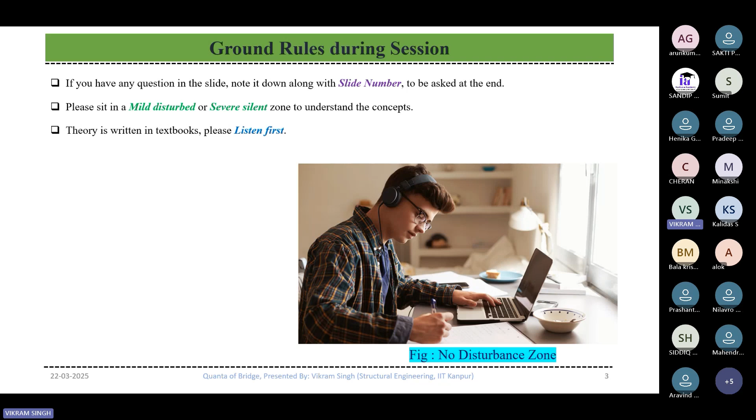Okay. So what is meant by bridge engineering? So let's see a video which will explain you a bit of bridges. Although you are completely aware of what is meant by bridges, the purpose of this video is especially to explain to you what is the extent of bridges which we have been working on, or I have been working on.

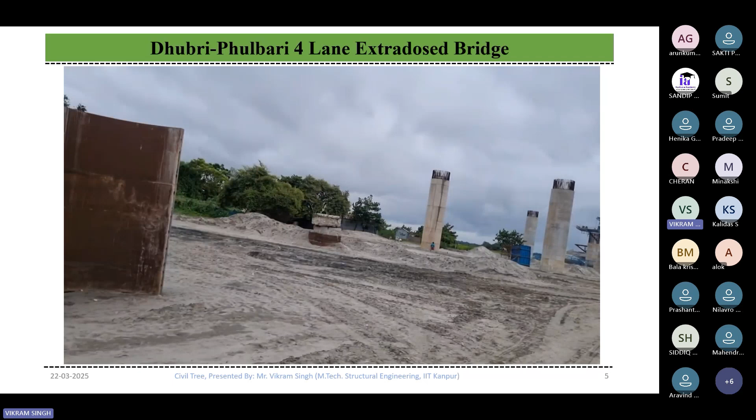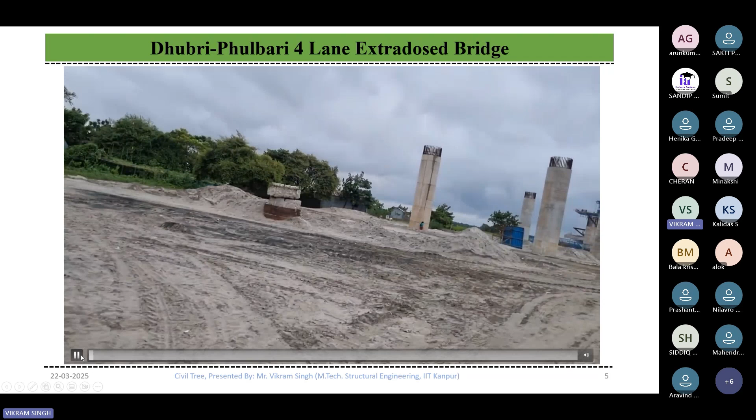So just for the confirmation, I hope the audio of this video is also audible. No, actually, only the video is visible. I'm not sure how to make it. Okay, just give me 1 second. I will try this if it can be possible. Audible now? No, actually, I think your system audio settings need to be changed. Okay, it's okay. Just try to see this, and even if it is not audible, at least you will get the visuals here. I will just skip this video in a few seconds only.

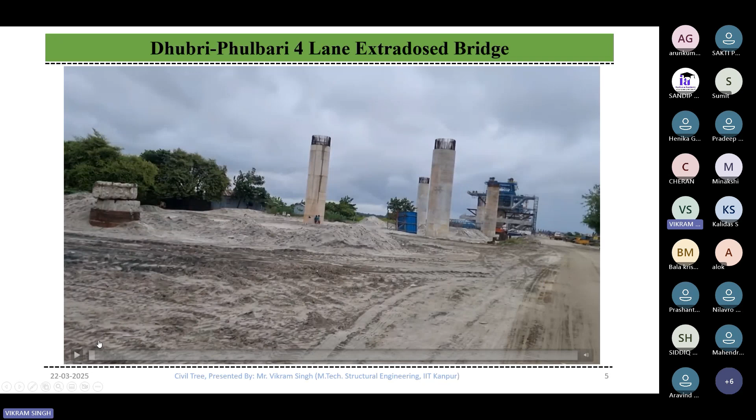See, this is the extent of bridges we are talking about today. This bridge, which is shown here, has a width of 28 meter. The depth here is actually 6.7 meter. And the width of pier here is actually 4.3 meter. So this is the extent of bridges which you will be working on when you join the bridge engineering industry.

I will not say that this will be the first project you will be working on, but these are the type of projects which you will be encountering in your career. And believe me, designing and working on such kind of projects has been really a good experience. But for that, you need to work on several types of projects, several spans, configurations. Only then you will achieve the level where you will start working on these type of structures.

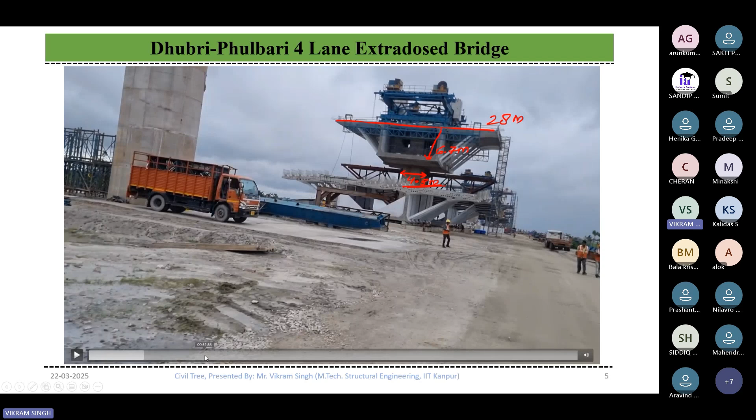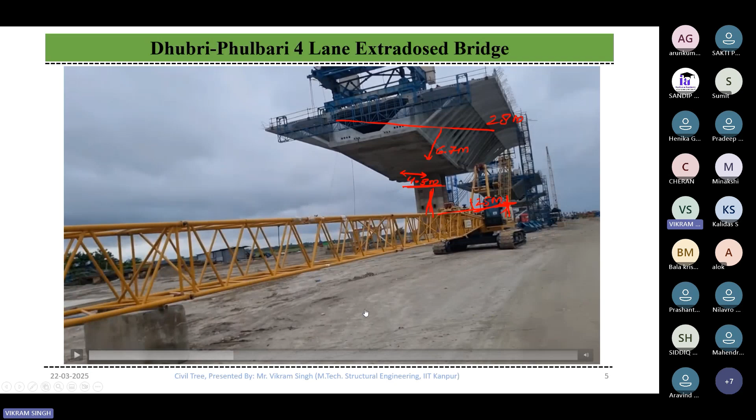Okay. And when we talk about the span of this bridge, this was actually 125 meter. So one pier is here, second pier, and the span is 125 meter here. So this is the level of extent to which the bridges are constructed. Not always like the 20 or 30 meter span which you generally see. But these bridges are highly special. So we need a special experience to work on these type of structures. You can see the distance between the piers here also.

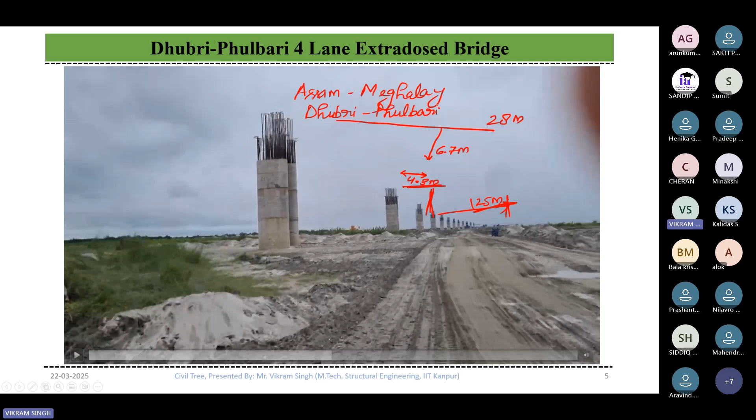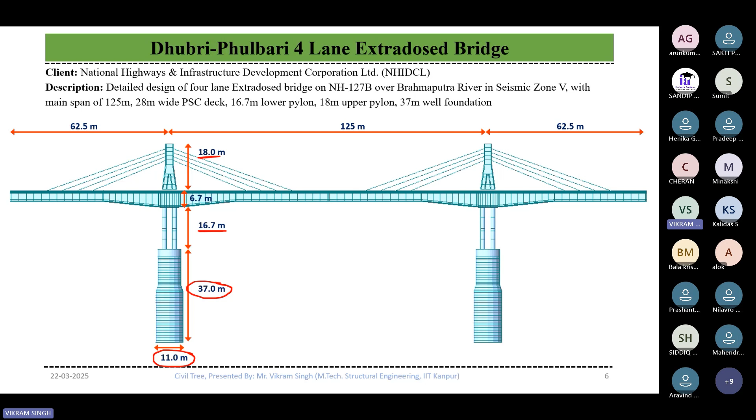Let's move ahead towards the real bridges. Just give me a second. Yeah. So what is a bridge? Generally, we say there is a bridge, this is a culvert, this is a causeway, this is a vented causeway, there is a flyover. So what is meant by a bridge? In general, all those structures which you see, which have different nomenclatures, are called bridges. But what is meant by bridge in general?

So in general, the bridge is the way of connecting two places. A bridge is a structure brought forward under construction to surpass an obstacle without affecting the properties of the obstacle. So let's say there is a bridge or a flyover connecting one place to another. You don't want to affect the properties of this river channel or sea. That's why you are bringing a bridge. If you could alter the properties of the obstacle itself, then you don't need to construct a bridge. If you just fill the soil strata over here, then you don't need any kind of bridges, right? So there are different categories technically in the bridges itself, but in general, all those structures are called bridges.

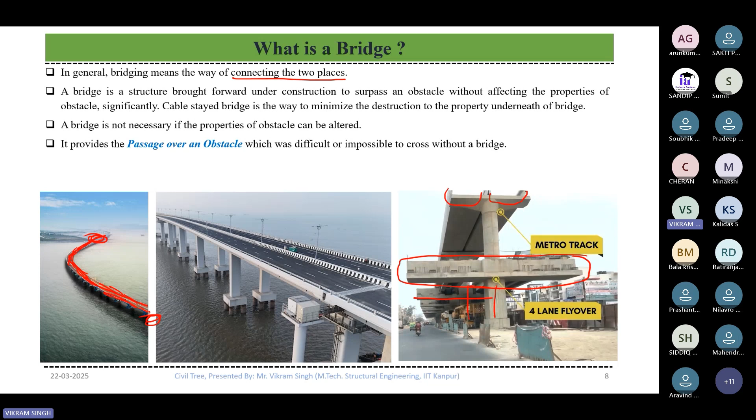In the past or ancient era, we had natural bridges. At that time humans did not know what is meant by cement, concrete or steel or how to construct a bridge. So the wooden arms which fell down on the ground, humans connected all those branches and formed a structure to pass this water carrying channel. So in general, this is also called a bridge.

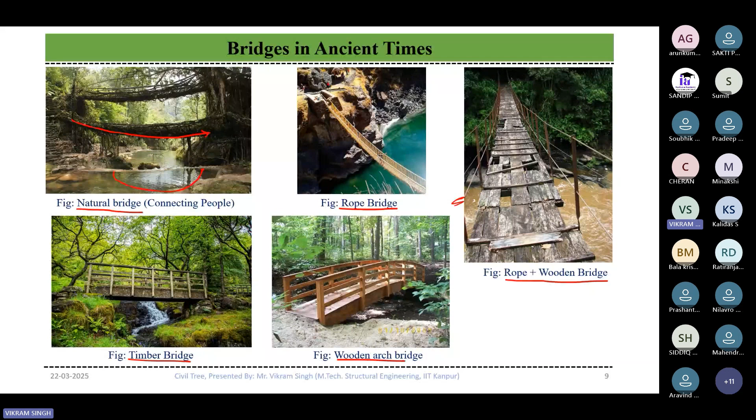Then when they developed the thinking capability, they constructed a rope bridge or rope plus wooden bridge. And now you see different types of bridges in different locations and areas. Depending on the location, be it a valley, plain ground, hilly ground, or Registan or anywhere, different types of bridges are constructed.

In the modern era, we have different types of bridges, but in general, bridges are divided into 6 categories. Each bridge may fall into 2 or 3 different categories; it is not only simply supported or arch bridge. For example, in general we call this a truss bridge, right? But it is resting over the bearings, so this is also termed a simply supported bridge. So the same bridge falls into 2 categories, simply supported bridge and truss bridge.

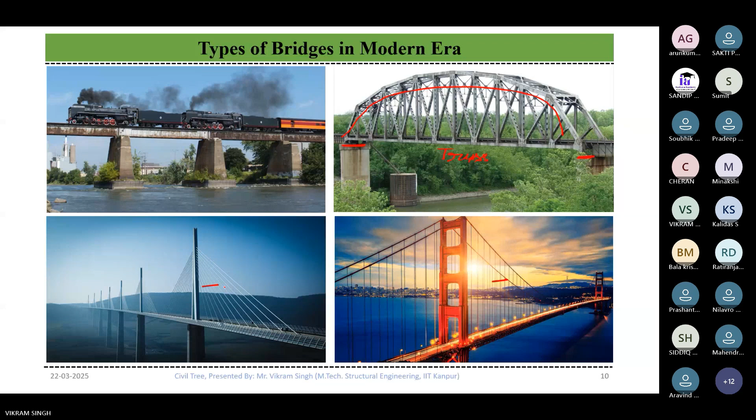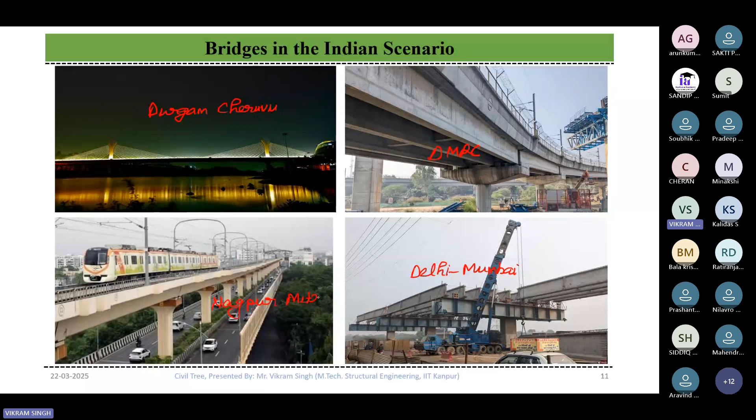Okay. And at the bottom, this is a suspension bridge. And on the bottom left, it is a cable stayed bridge. So in today's era, we have different categories of bridge. If I name some of them, this is in Hyderabad. This is the DMRC, Delhi Metro Rail Corporation viaduct. This one is under construction, the Delhi Mumbai Expressway. This is still under construction. And this one is Nagpur Metro. So all the figures given here are real life examples of bridges.

Then when you talk about general bridges, when we are working in the industry, we have different types of nomenclature. When I'm designing bridges, I don't even care whether it is longitudinal girder, abutment, cross girder, or pier. We don't see these kinds of figures. This is an academic figure. When you start working in the industry, this is the type of figure you will see.

Okay. But in general, when you are starting the journey in bridges, when you are asked questions in interviews, they will generally refer to these types of figures. Why? Because freshers or beginners have been through the academic books only. They are not industry experts. They have not been through the industry. So personally, I don't expect anyone to know about bridges already.

One of the major questions I generally receive from beginners is, if I appear for a bridge engineering interview, what kind of questions will they ask about bridges? If you are going for a bridges interview, the person taking your interview doesn't expect you to know even A or B of bridges. Even when I was going through my masters, I did not have the bridge engineering subject. In 99% of cases, the bridge engineering syllabus is not available in the academic curriculum. So interviewers don't expect you to know bridges before working in bridges.

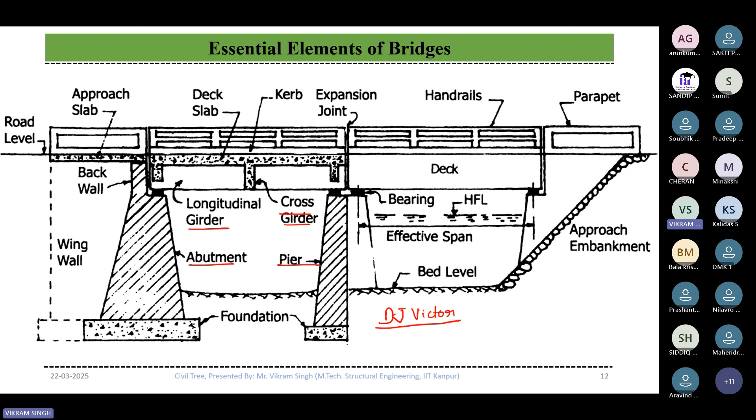Then there are different types of bridges. Some of the bridges have prestressed I-girders. Some of them have prestressed box girders. Some of them may have steel girders, plate girders. Some of them may have trusses. If you are aware of the Mumbai-Ahmedabad high-speed rail, it is being constructed with 40-meter single spans, a single entity of 40-meter length.

This is one pier, the second pier, and they just bring one segment of 40-meter length with 3-meter depth, which weighs around 1000 to 1100 tons. So they are carrying big machinery to construct this structure. And along with this, you will find several types of PSC girder, box girder, and steel girder or truss bridges also, depending on the suitability of the location.

Let's say you are constructing a bridge over a busy highway. Then you cannot stop the traffic. So you have to bring forward a solution for which you do not need to stop the flowing traffic. So they brought forward the steel truss bridge for that. As far as I remember, it had a span of 135 meters.

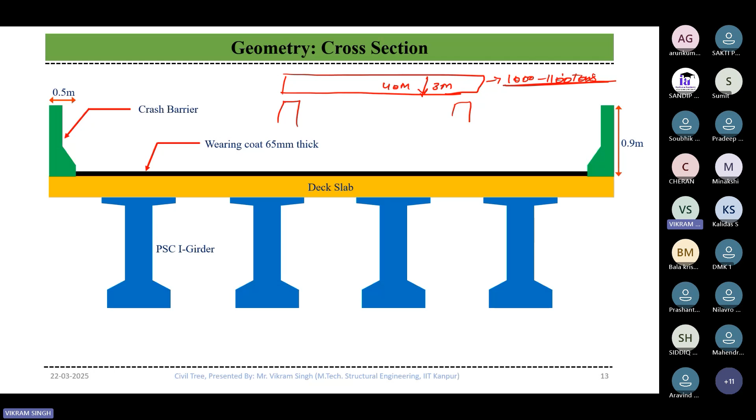Hello. Hello. Yes, Vikramji. We are. Okay, you are audible. If I skip somewhere, please inform me, because I'm getting a sound like my internet connection is not stable. No, you are completely audible. Okay, no problem.

So when you are constructing bridges, the first and foremost question I may ask you, or someone may ask me, is: I have a 1-kilometer-long flyover, what kind of structure shall I suggest? Shall it be a concrete slab beam, an RCC T-beam, a PSC girder, box girder, or may it be extradosed, cable-stayed, or suspension bridges?

The longest suspension bridge right now available in the world has a span of around 1900 meters. The clear span between the two piers is more than 1900 meters. I'm not sure exactly about the value. It may be around 2000-something meters, but this is the longest span. So let's say if I'm going to construct a 5-kilometer-long bridge, I can just construct 2 or 3 spans only. No need to go for 100 or 500 spans.

But why do we not go for such bridges? Forget about the suspension bridge. People are even scared of cable-stayed bridges and extradosed bridges. They hardly go for RCC T-beam or concrete slab. But most of the bridges and flyovers are constructed with PSC I-girders and box girders. But why? So when you go to the economic study of structures, especially bridges,

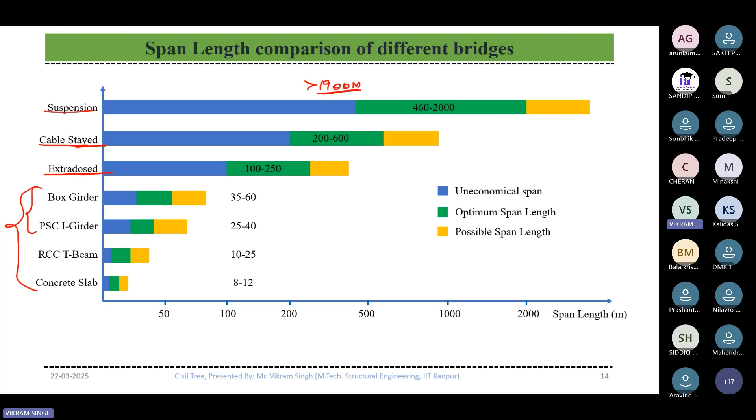So when you face interviews for bridges, these are the kinds of questions they will ask you: if I give you a span of, let's say, 30 meters, then which kind of material or type of structure will be more suitable? Okay. Now let's say you are going to design a bridge with PSC I-girders.

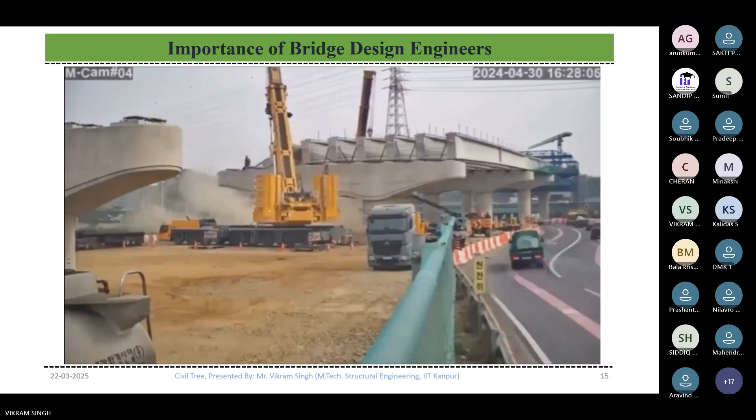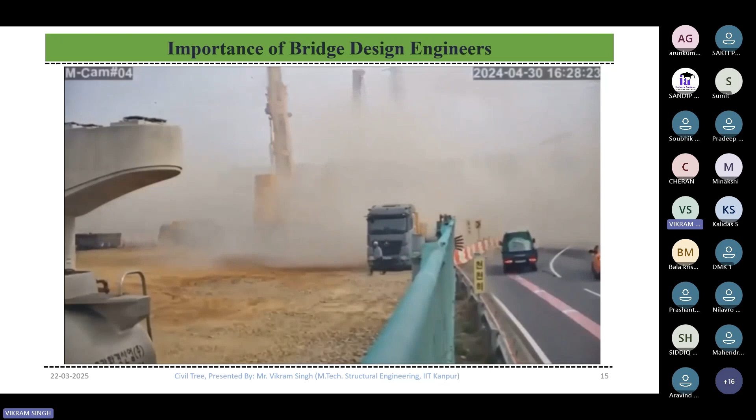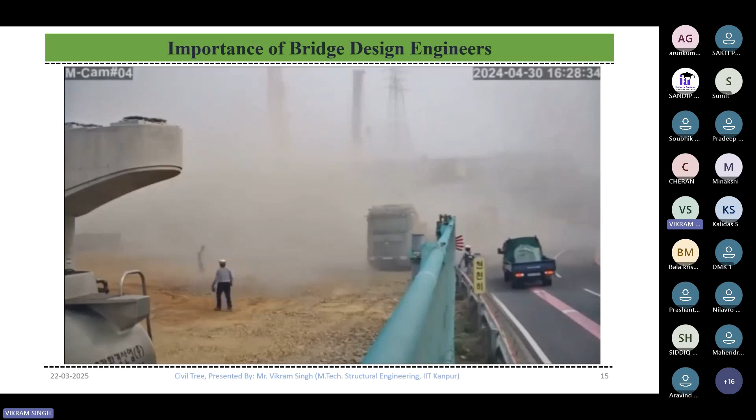See this, just one minor error on the construction site and the entire span fell down. That's the importance of engineers, be it design engineer, site engineer, or safety officer. All of them are important given their specific roles and responsibilities.

This incident might have been avoided if the engineer was there to guide the laborers, to guide them how to construct this kind of bridge, or not just construction. There are small activities which may lead to disaster on the site. So engineers shall be there to guide the laborers how to handle the different types of components.

Okay. Although nobody wants to lose their life, they are already taking care of each and everything. But laborers are not engineers. They don't know the implication of each and every component on the site. So you are there, who are aware of each and everything in this field.

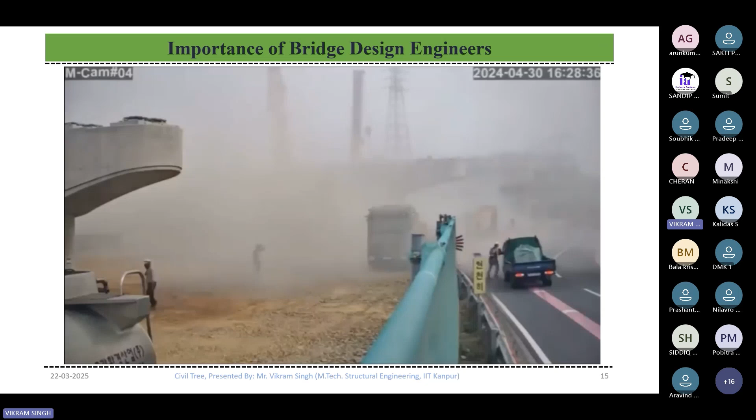I'm not saying that you are a fresher and you shall be aware of 100% of everything, but you are also guided by the seniors. So you learn from them and guide the laborers what facts or rules you have to remember while constructing or handling this component, right?

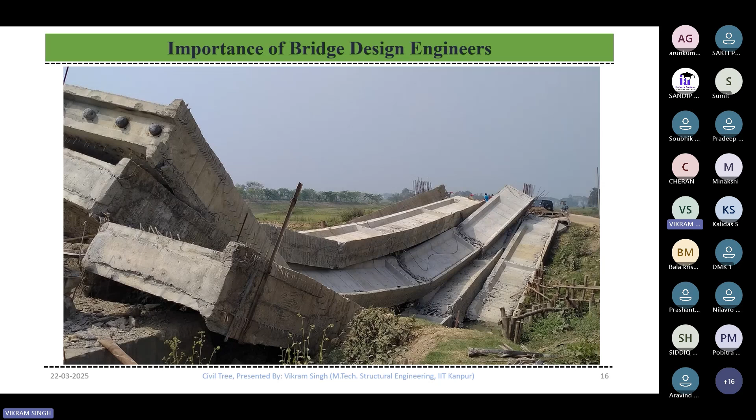See, this is one more case of falling girders, PSC girders falling on the ground. Just kept on the pier cap and the girders fell down. That's it. The deck slab is not cast, no vehicles, nothing. The girders fell by their own self-weight.

Okay, so when there is any allotment of a project, there is not only a single authority. There are different types of authorities who will be working for a single project. So there will be one client. Let's say there is a highway project and the client is NHAI. NHAI will allot the project to some contractor after the bidding process.

The bidding process is a different procedure. You can just go to Google and find out what the tendering process, bidding process, all those things are. I'm talking about after the allotment of the project, how the work flows. So NHAI is one client. They want to construct a bridge.

So what they will do, they will allot this project to a contractor. The contractor will bring all the materials, machinery, and they will construct the bridge. But the contractor does not know the design. So who will do the design? The contractor will hire an authority who will make the detailed design of each and every component. And that authority is called Detail Design Consultant, DDC. And this DDC is hired by the contractor.

Now, how to make sure that DDC is working at 100% accuracy? So there shall be one more organization which will make sure what DDC is doing is really correct. So the contractor will hire one more organization called Proof Check Consultant, or PC. So PC will check the designs prepared by the DDC. So the contractor will give the design to DDC, which will be proof checked by the PC.

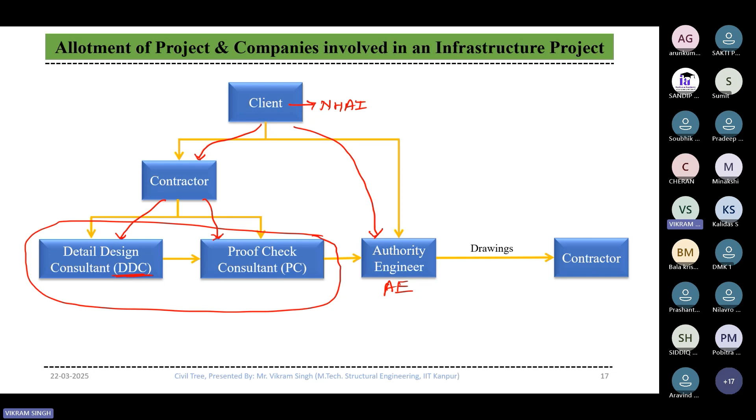So even in the design, this is not just one job. If I talk about myself, I do my design, then my senior will check it, the manager will check it, meaning three people are checking at the DDC level. Then it is checked by one engineer in PC and one senior in PC, 5 candidates, and now it is going to AE. Do you really think it is even possible that a bridge falls down under construction?

It is very, very rare because it is checked and designed by 3 companies and several levels there also. There are 10s, 20s, or 30, 50 people who have worked on this design. And still if the structure is failing, personally, I don't believe that it failed because of design failure. Maybe there are different types of incidents happening on the site, but from the design part, I make sure that a structure does not fall down.

Then after all the authorities and engineers have verified the design, at the end, they will produce a drawing which will go to the contractor. Now the contractor will go to the client, get the drawing signed, go on the site and construct the structure. This is a general procedure which is followed in most projects.

Not all, most projects, because this method of construction or allotment of project is called EPC, Engineering Procurement Construction. Most bridge projects or highway projects are allotted on EPC mode. Some of them are on item rate or lump sum mode, depending on the scale of the project. But NHAI is allotting more than 99% of projects based on EPC mode.

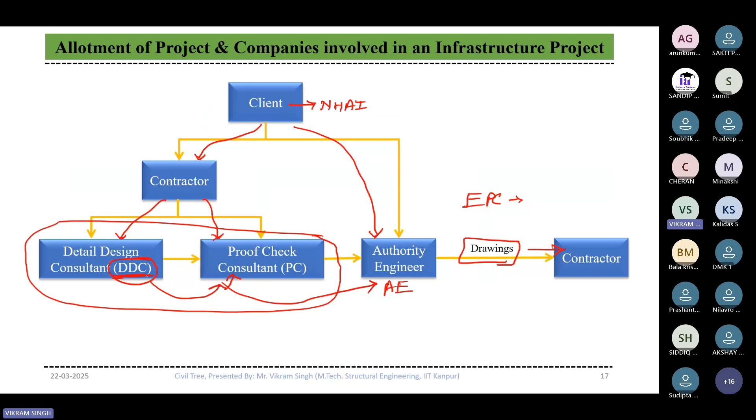In fact, all the organizations here, DDC, PC and AE, they all fall in the category of engineering only, and that too in design engineering, not site engineering or construction, because on construction they have other engineers. So if you're going into buildings and metros, you will have architecture available with you, because buildings and metro stations cannot be constructed without the consultation of architecture. So an architect is not as such useful in highway bridges, but it is compulsory in metros and buildings.

Then after the architecture, it will go to the engineering. Engineers will perform their analysis, design, then drawings, and then the drawings will go to construction. And construction is the real product of the AEC industry, the actual product which is being constructed on the site.

Let's say there is a metro station constructed in DMRC. Nobody knows who was the architect. Nobody knows who was the design engineer. They don't even know who was the site engineer. They just know what is constructed there. It is a metro station. That's all. Nobody cares about the engineering.

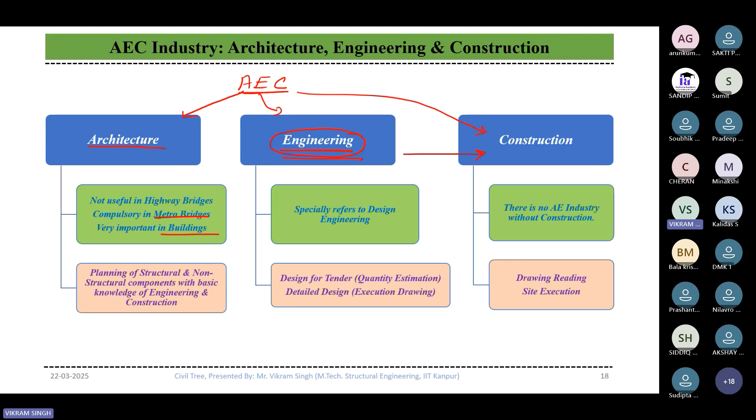But there is a lot of hard work going on behind the scenes, which makes sure the structure stands throughout its entire life. The life of a structure may be 50 years for buildings. It is 100 years for bridges. Some structures are constructed for 80 years or 120 years, depending on the requirement from the clients. So each category has its own implications.

Now, coming to the software in the bridge engineering industry. There are different varieties of software available in the bridge engineering industry. There is not only one software where I can tell you that you learn this and your job is done. There are a number of software available, but each has its own method of use. Let's say you are designing a small span bridge, just a 20-30 meter RCC bridge, then STAAD Pro is sufficient for you. You don't need to go for any other software.

And I'm pretty sure you know the cost of the software. I will not tell you directly here, but if you are already aware of the software cost, then you will understand one most important thing: if you are working on a small scale project, you will utilize only STAAD Pro, no other software. Why? Because the cost of license for other software is very, very high compared to STAAD Pro. So when you are going to design a small span bridge, STAAD Pro will do your job.

When you are going to design a 40, 50, 60 meter bridge, then you will be required to use Midas Civil. It's not compulsory. You can use the Excel sheet itself and do your own manual calculation. But if you want to take advantage of software in this industry, then Midas or Sofistik will be your next choice. Now, what about the other three software? The other three are not as such used in the Indian market. Most of the industry is taken care of by STAAD Pro because it's not as costly as other software.

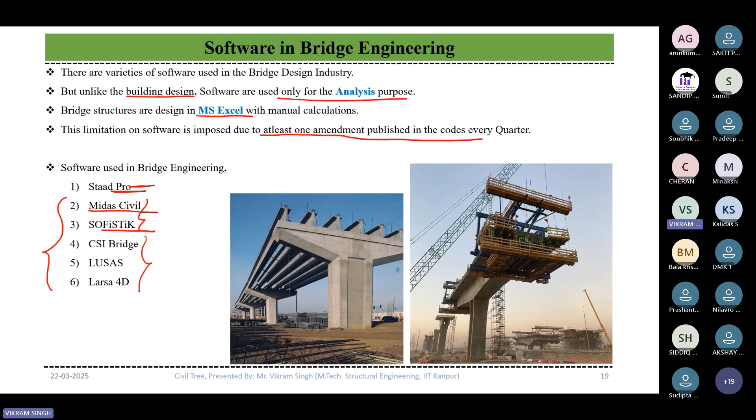Now why don't we use software for the design? Because there is at least one amendment published in the code every quarter, and software is not updated that frequently. So if there's an amendment not updated in the software, who is responsible for the errors between the code and the software? So in general, in bridges, we use Excel for the design and software for the analysis.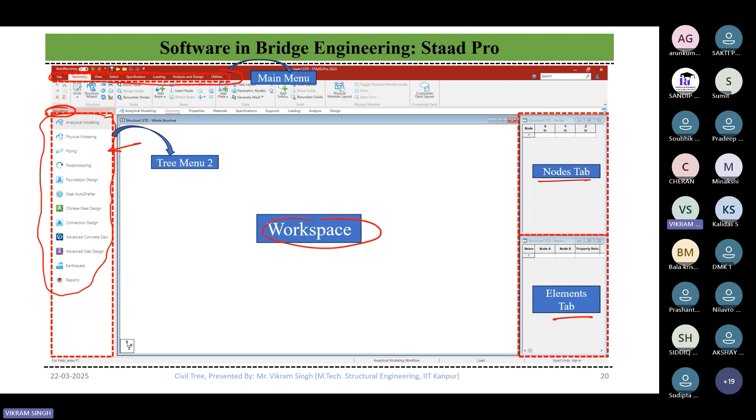But if you go to Midas Civil, the same menu is called tree menu, found at the top. All the jobs you perform in this workspace will be listed out in the tree menu, along with any error or warning in the message window, for modeling, analysis and design.

There is a main menu and all the options are available within itself. You can see that within the main menu view there are a lot of options, and within these options there are drop down arrows also, so there are a lot of options inbuilt within the options themselves.

When you are learning the software, it is not about the engineering, and when you are learning engineering, it is not about the software. Software and engineering are two separate things. So why are we using the software, or is it really separate? No, then where is the connection? You are the connection - you are the engineer doing the design engineering. The software is produced by another company, and it's your responsibility to bring the design into the software and utilize it at its full scale, considering accuracy.

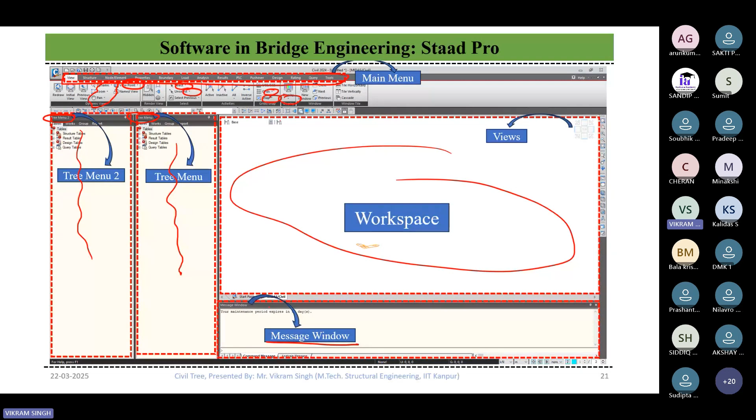So you have to be responsible, and you have to make sure the structure which you are designing is standing throughout its intended life. Then the third software, it is the SOFiSTiK, which is making its feet or standing its feet in the market and started a few years back.

When you start learning bridges, just like buildings, we have different types of design codes. Comparing your IS 456, IRC 112 is a mother code for the bridges. Let's say I write different types of comparisons: IS 456 is equal to IRC 112.

IRC 6 is equal to your loads, so you have IS 875 for the loading, and IRC 6 we have the loads. Then IRC 5 is for the standard specifications. Just like when you are designing a building, there are certain norms that your height cannot be more than 4 or 5 floors, and your floor index area cannot exceed a certain value. So all these guidelines are assigned in IRC 5.

Then IS 1893 is equivalent to SP 114, that is the design code for the seismic design of bridges. Then for steel you have IS 800, and in IRC there is IRC 22.

At the place of IRC 78, it is for the foundation, we have 2911. Then explanatory code for highway bridges we have SP 105, and in IS we have, I think, SP 34.

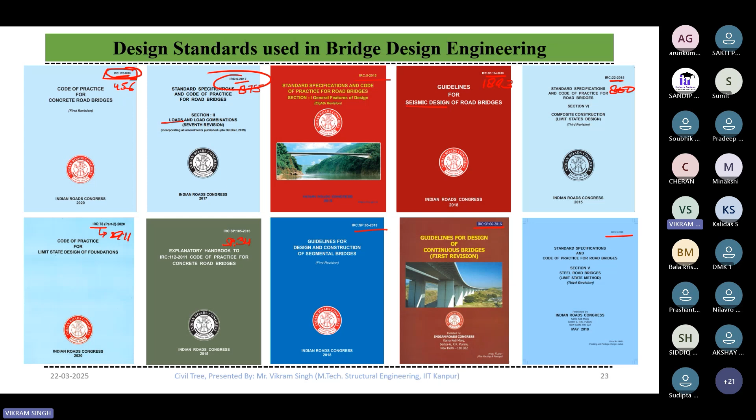Then there is a construction industry. In the construction industry, we have a lot of categories available on the site. There is a billing engineer, site engineer, estimation engineer, or the bar bending schedule engineer. There are a lot of categories. I'm not exactly sure how many engineers are working there or what different types of categories are working on the site, but some of them which I know I have explained.

But believe me, the job which you are looking for, the design engineering, as far as I have experienced it, I will not say it is easier, but comparative to the site engineering job, it is really easy. Because there have been a lot of cases where the site engineer wants to change their job to design engineering, but I am not aware of any engineer working in the design field who wants to shift to the construction side.

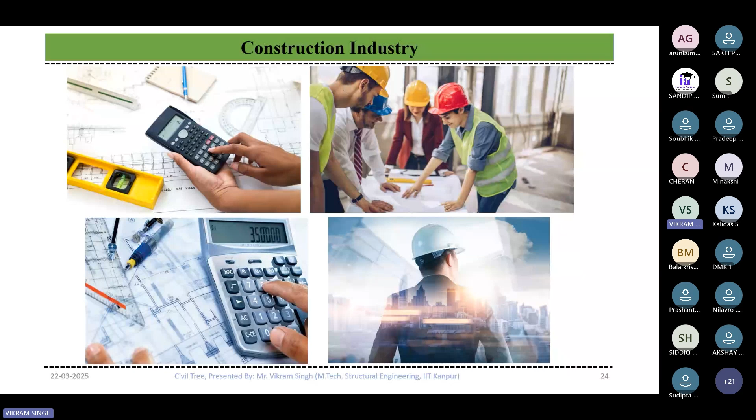So in my opinion, the construction of a real product is far more difficult. There are different types of challenges which you will face on the site. We will discuss it later.

So when you are going to construct and execute a PSC girder, there are different types of stages. You will place your reinforcement at the location, different types based on the requirement. Then you will put all the shuttering for the construction of the girder. Then after construction of the girder, you will pre-stress it, because when you go a span more than 20 meters, which is a general case in the industry, most of the structures are pre-stressed concrete structures. It may be a PSCI girder bridge or box girder bridge, but most of the structures are pre-stressed concrete bridges.

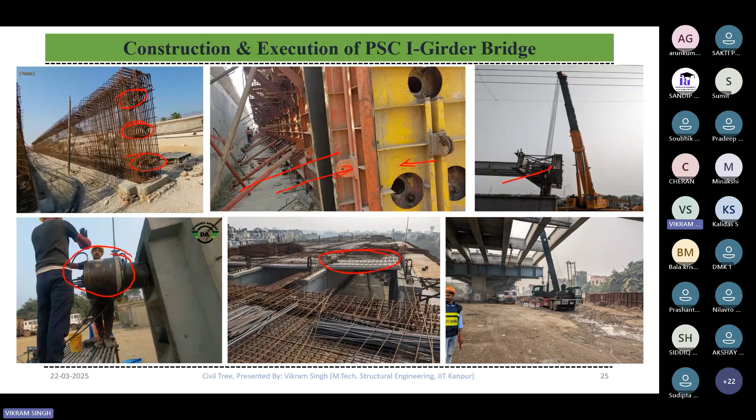And that has been the most economical form of the structure in today's era. Given that the location is not prevailing, like the example we gave before, if you are constructing a bridge in Jammu Kashmir, then PSCI girder is nowhere economical. Then what you will do after that, you will place the girders on site, then you will cast your deck slab and the construction is over. In the same way, all the procedures which you have to follow on site.

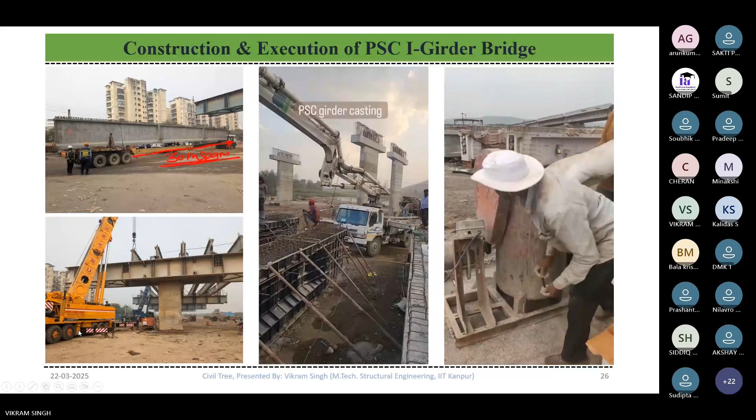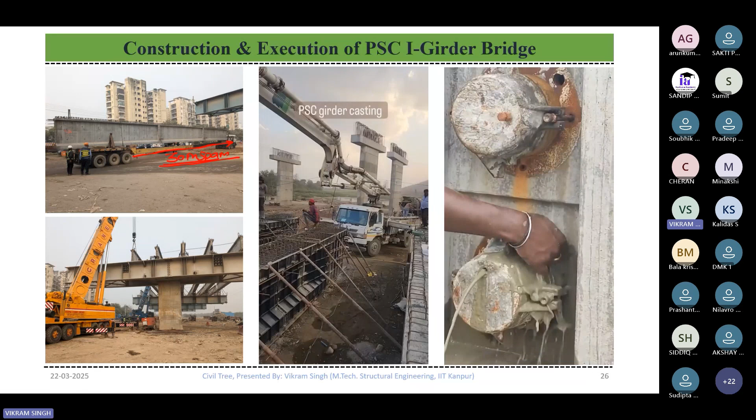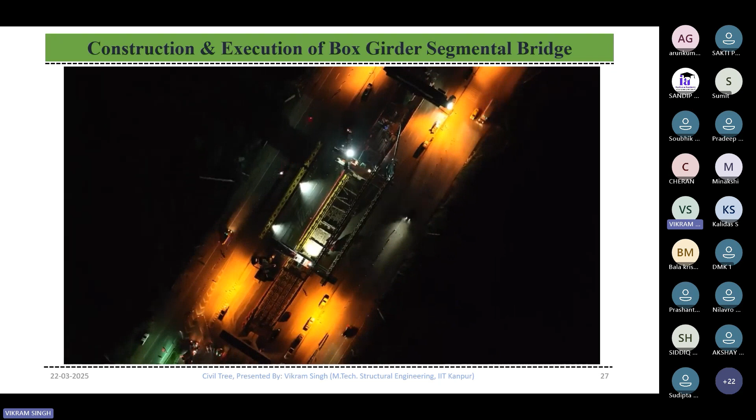So there are different types of jobs you have to carry out in the design field. If you are more interested to learn the procedures to be followed on site, we can discuss it later. Let's see one of the videos they have followed on the construction site for the construction of box girder bridges.

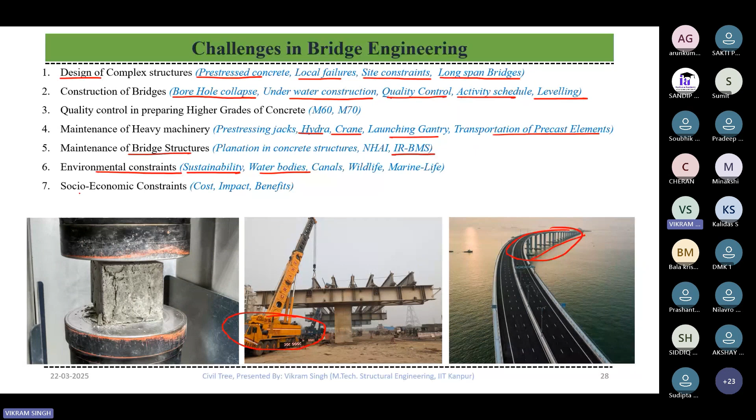Then there is a special organization, Indian Railways Bridge Management System, which takes care and maintains the bridges for the railways. Then socio-economic constraint, the cost, impact, and the benefits it will make. Then challenges in the bridge engineering industry.

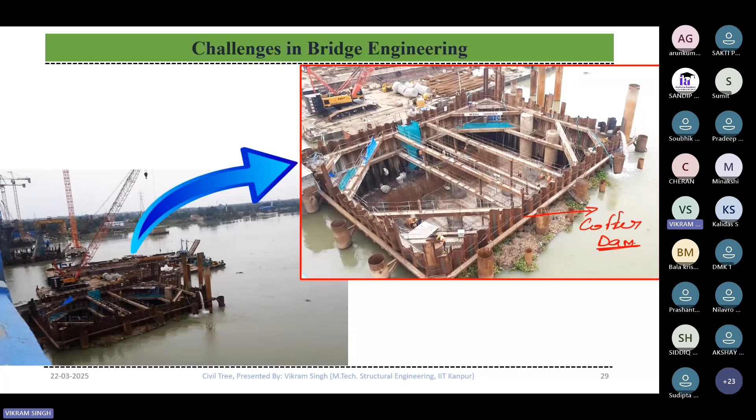You have to construct a bridge, but how will you dig down and construct the piles? Because unless you finish your piling, your structure cannot stand. So what is the challenge, or how do you solve it? You make a coffer dam. That's how you will excavate for the piling and construct the bridge.

Then this is not just about the designing. What are the different engineering disciplines involved in the bridges? The hydrology.

When you are constructing, let's say, a box culvert, this box culvert is used to allow the water flow below the traffic. Until unless you know the availability of water, what is the catchment area, what is the runoff, how much cusec you will get, which you have to allow through this box culvert, then what will you do in the designing? So hydrology has been the first and foremost department.

Along with that, there will be the highway engineer, who will make sure all your notations, the boards, symbols, everything is intact on the site wherever required.

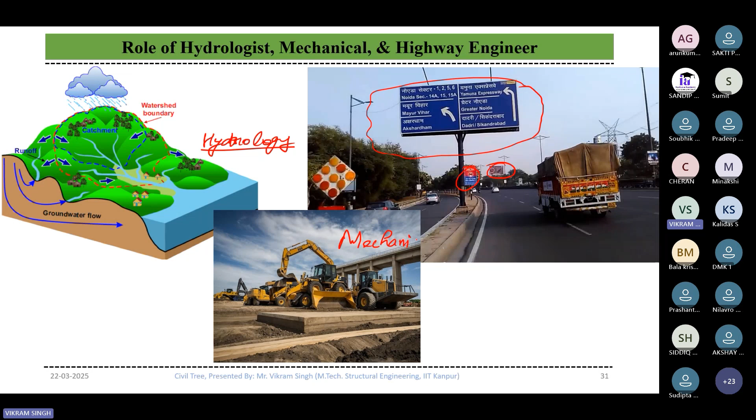Then the mechanical engineer, because all the machinery you are using on site, what if there is a failure in the machinery itself?

After that, you need the geotechnical report. Who will give it? The geotechnical engineer. You need the bearing capacity of soil. Who will be there? The geotechnical engineer.

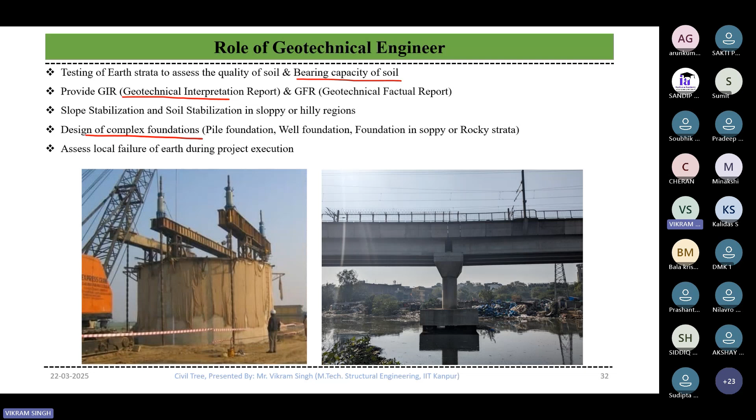Means the geotechnical engineer is also the prime engineer even before the designing of bridges, who will make sure your structures stand for their entire life. Then if you need the complex design of foundations, where the structural engineer cannot design all the structures on their own, you will need the geotechnical engineer. And for all the local failures of the earth, you need the geotechnical engineer.

Let's say this is a hilly area and you need to construct a highway here. What will you do? Let's say this was a correct slope. You will cut from here. Now what if this structure falls down? This rock or the soil falls on the left? So the geotechnical engineer will be there to make sure the area required for the movement of traffic is always available, by anchorages. So it's the responsibility and role of a geotechnical engineer to provide sufficient space for the highway engineer.

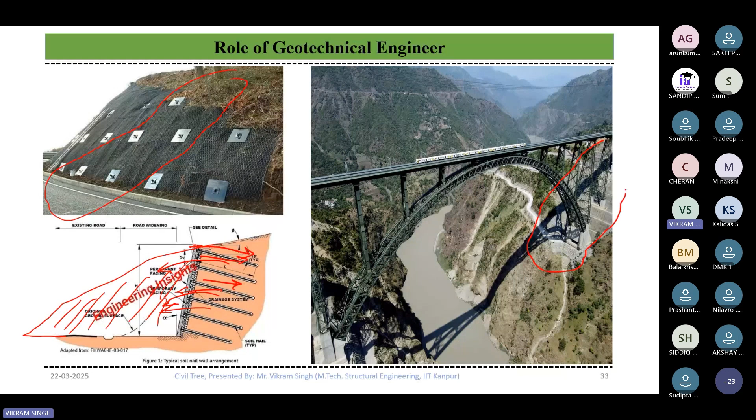On the right, you will see the stepping. Who makes sure this stepping does not collapse? The geotechnical engineer. Okay. Now coming to the career opportunities in the bridge engineering industry.

So the first and foremost question, which everybody has: is it really worth pursuing? You can go to buildings, bridges, highways, environment, geotechnical, hydrology, the petrochemical industry, or water treatment, water effluent treatment, you can go anywhere. But is the bridge engineering industry really worth it? And yes, not a big yes, a small yes, based on your interest. Then what are the things you have to make sure you are aware of before joining the bridge engineering industry?

If you are curious to know what is running behind those panels, which panels? These panels. If you want to work on complex and challenging projects in bridges. There is a big challenge in tall buildings, it is there. Similar to that, there is a big challenge in bridges. If you are amazed by large scale mega projects, if you want to explore the infrastructure in the entire world,

the bridges which you are restructuring or designing or constructing, this is not just one book you will learn, go through, and design the structure. It is never possible. You will attend and join the conferences conducted by international organizations. You will be learning from books written by foreign authors. In fact, I have been researching through the Canadian, European, Californian, Australian, American codes, all those codes, to design my Indian structures.

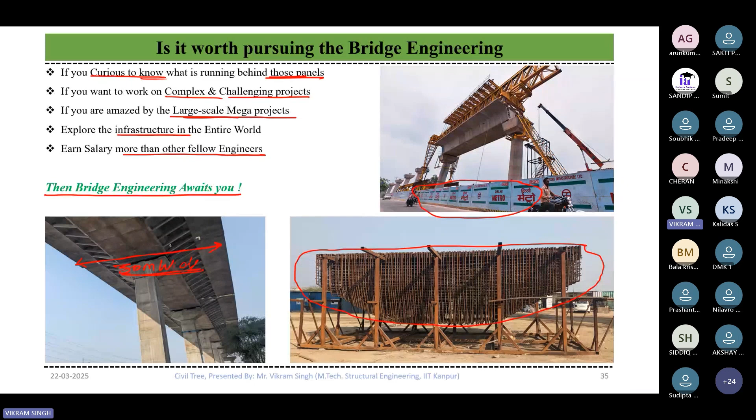If you follow all these facts, if you are curious about the panels, if you are amazed by large scale projects, if you want to work on and explore infrastructure projects, then yes, the bridge engineering industry is waiting for you. The small structure which may seem small to you is actually 30 meters wide. It does not look it, but it is. Can you see anything through this janjal? Nothing. This is the level of reinforcement you will be putting in your structure. So there are a lot of things which will amaze you when you join this industry.

Now, do we really need a masters in structural engineering? Maybe. But is it really required? No. If you want to join bridges, a masters is not compulsory. And it is not said only by me. You can go to LinkedIn and find this person, Muhammad Aatif Nawaz. He is working in Atkins right now. He worked in buildings for 4 years, and now he has been working in bridges for the last 2 or 3 years. And he has given this statement that a masters in structural engineering is not compulsory if you want to enter the bridge engineering industry.

Okay, you can just search for this person on Google, on Quora, on LinkedIn, on YouTube. You will find him everywhere, and you will find this similar statement at every platform: that a master's is not compulsory to join the bridge engineering industry. It is not compulsory, but what if you have a master's degree? You will get a certain advantage over the bachelor's.

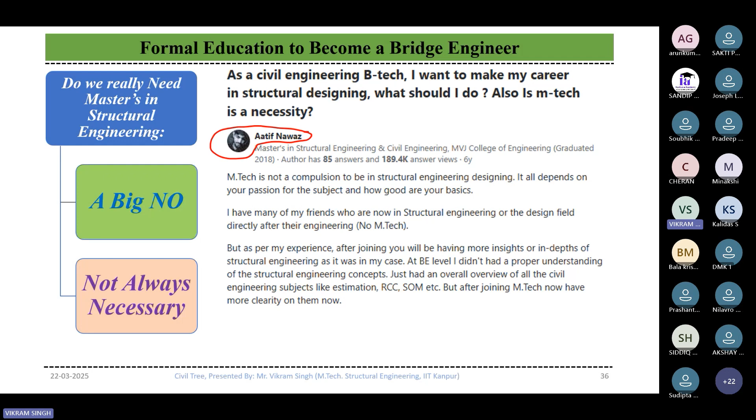Why? Because if you are specifically interested in the design part, then after RCC and steel, what we study in the bachelor's, you have studied the dynamics also. So that will give you an added advantage. But that does not mean a master's is compulsory to have a job in bridges. Okay. Then there are different roles and responsibilities which are assigned to an engineer if you want to pursue the bridge engineering industry.

So let's say you are not aware of anything in bridges, or not even aware of anything in buildings, or in the civil engineering industry itself. You just went to college, got your degree, and passed out without knowing what is meant by civil engineering. If you lie at that level, then what you can do is start from a local bridge design consultancy, a local site consultancy, or a site engineering job. At least you start your job, because until you are experienced enough to work on a certain kind of project, the second company will not hire you.

Let's say you want to work in the metros. You don't have the experience of metros. No company will hire you. Then what can you do? You start with local design consultancy, local construction companies. At least you start from there. Then with reference to your experience, you will get the job in different companies. You gather experience in any design engineering field at least, so that you can achieve a big height in different organizations. And if you are really interested in pursuing this field, not site engineering or anything else, then yes, pursuing a master's may be one more option for you.

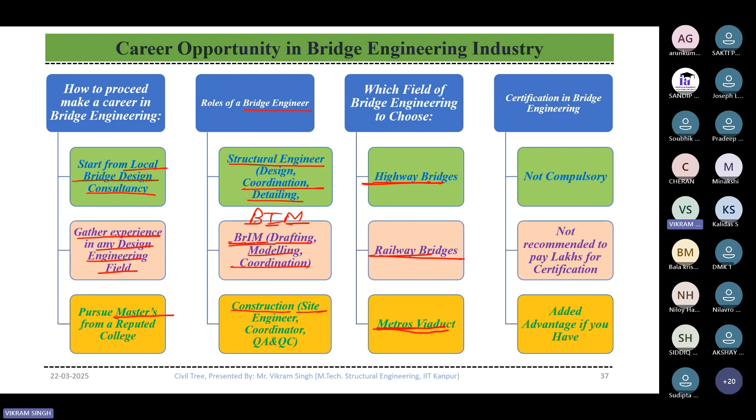Okay, so neither masters nor certification is compulsory to become a bridge engineer. Although if you have, it will just give you certain advantage, maybe 2, 5 or 10% max, not more than 10%.

Then coming to the BrIM, just like the building information modeling you have, there is a software called BrIM or CIM actually. CIM is a software developed by Midas Civil company. The software which we have already discussed in the back, StaadPro, Midas Civil and Sofistik, CIM is developed by Midas Civil. So let's see this video that you will understand how CIM can be used in the bridges.

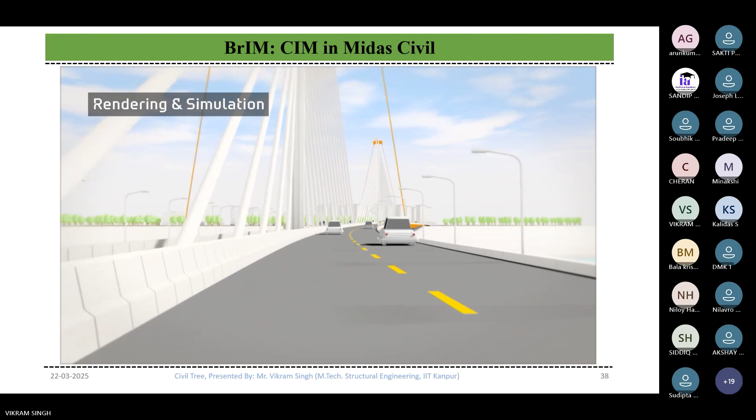So Midas has been one of the best companies to provide its software called Midas Civil. And after the Midas Civil, they have provided Midas CIM, Midas Finite Element, Midas GTS. There are a lot of software as a family in the Midas company. So based on the requirement, you can follow any of the software.

Then some of the tips and tricks that I can share with you for the interviews when you are appearing. I'm pretty sure that you do not have any level of knowledge in the bridges, but you shall have the basic knowledge of design, especially IS 456-2000. Okay. And if you understand the IRC code, that will give you an added advantage. But that does not mean you will be hired. It will give you the advantage because designing is a primary thing. If you know IS 456 design, that's all, because the design of bridges and buildings are similar.

Similar in the way, if you have bending moment in the buildings, you will not call it torsion in the bridges. Bending moment will remain bending moment, shear force will remain shear force. So design procedure remains similar in both the codes. You shall be aware of the construction activities because these are the basic things which are expected from anyone, irrespective of whether you are going for the interview in the bridges or buildings.

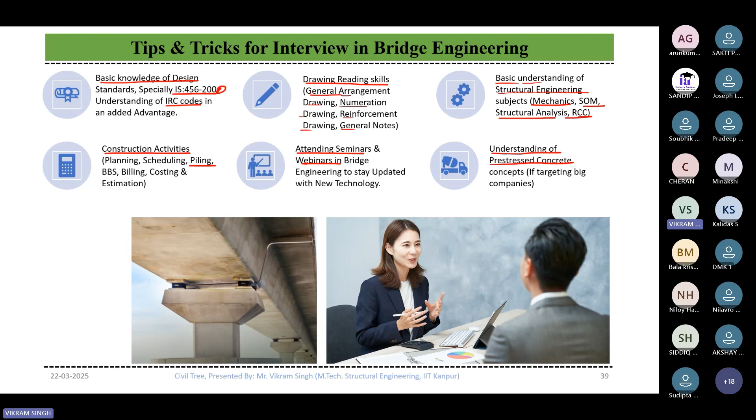Then understanding of pre-stressed concrete concept. You have to make sure you know the pre-stressed concrete bridges if you're directly targeting the big level of companies, the MNCs or the big consultancies. If you're targeting the bigger level of companies, then they are also expecting the bigger level of skills. And what is the bigger level of skills in terms of bridge engineering? That is the pre-stressed concrete bridges. As I have said already, more than 90% of the bridges are constructed of pre-stressed concrete.

Okay. Then what are the references to learn the bridge engineering? You can follow the book. In fact, the figure I was showing you in the beginning, that was taken from D.J.

Victor. And this is the best book if you are starting your career in bridge engineering. If you are a beginner or fresher, please follow the Essentials of Bridge Engineering written by D.J. Victor. This is one of the best books you will ever find in the bridge engineering industry. Then coming to pre-stressed concrete bridges, or let's say normal pre-stressed concrete, that you can learn from the N.

Krishnaraju pre-stressed concrete book. Then coming to the in-depth fundamentals of bridge engineering, you can follow the fundamentals book written by W.F. Chen and Lian Duan. That will give you the most basic fundamentals. But remember one thing, this book carries all the concepts highly in depth. So reading this book will take you months, and it is not written by an Indian author either. So understanding their style of writing and concepts will again be difficult. So better you start from the first book, D.J. Victor, then you move forward to the different books.

Coming to the online courses, the Indian Association of Structural Engineers, IAStructE, is one of the major organizations in the field of structural engineering. They provide different types of courses. I have also joined several of their courses. You can join their courses to learn from the industry experts. Let's say they conduct a course on pre-stressed concrete for bridges and buildings.

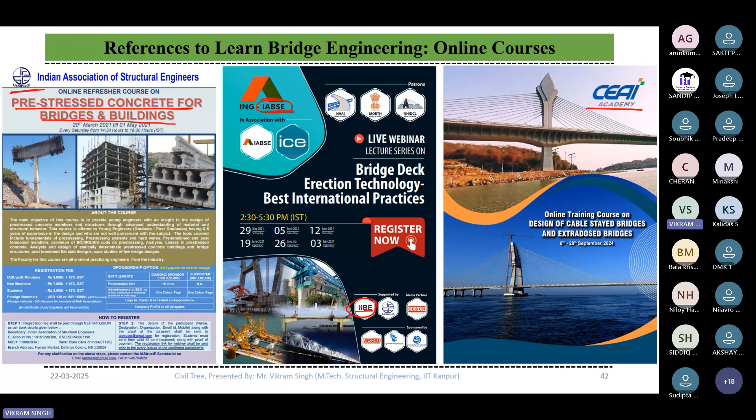As of now, I have joined one course on retrofitting of bridges by IABSE. It is conducted every Friday, 5 to 8 p.m. So based on your requirement, you can join the different courses produced by different organizations. And it is not always that they will produce one course in March, February, or whatever. They can produce their course anytime. Okay. So you have to keep an eye on all the platforms to make sure you do not miss their course.

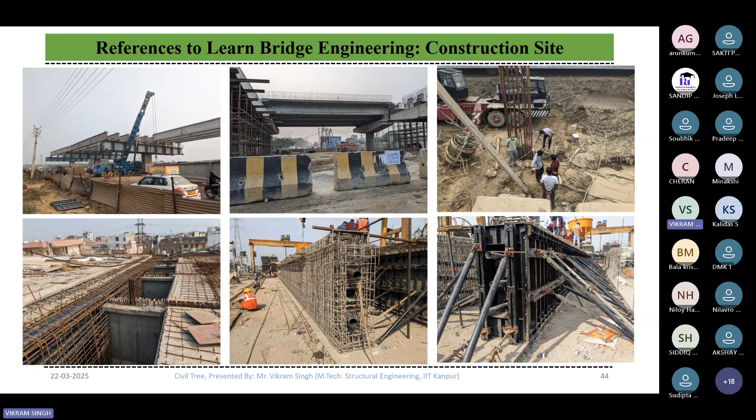Then Bridge Engineering. It is an academic course taught by Professor Piyali Sengupta. You can refer to it. This will be the best online course in bridge engineering available on the NPTEL website. Okay. Then places to learn: the construction site has always been the best reference to learn bridge engineering. So that's all from my side.

One of the major things I can tell you right now, even if you do not come to bridges or you do not know what is meant by IRC 112, please note down one special thing. The minimum strain in reinforcement before failure as per IS 456 is 0.002 plus 0.87 fy/Es. But as per IRC 112, this 0.002 has been removed. What does it mean? Let's say we take certain assumptions: the reinforcement grade is 550 and the effective depth of the section is 500, then the actual limiting value will change because of this factor of 0.002.

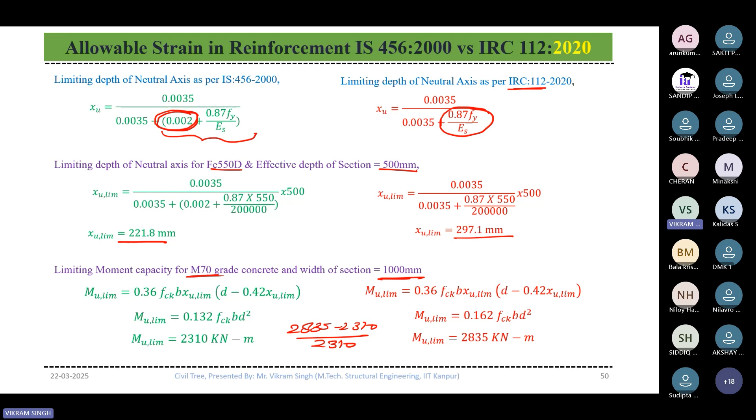How much change will there be? Looking at the bending moment capacity based on different grades of concrete and widths of section, I take 2835 minus 2310 divided by 2310, let's bring the calculator. 2835 minus 2310 divided by 2310. There is roughly a 23% increase in the ultimate bending moment capacity when the structures are designed based on the different codes. Okay. So that was the final thing I wanted to convey to you.

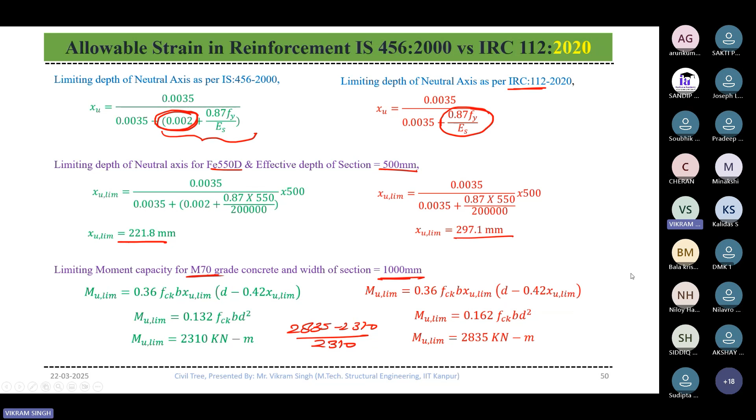Thank you. Thank you, Vikramji. This is a very detailed program actually. All the information that you have provided, I'm pretty sure for those who are starting the journey in the bridge engineering domain, this kind of session will be really helpful to them.